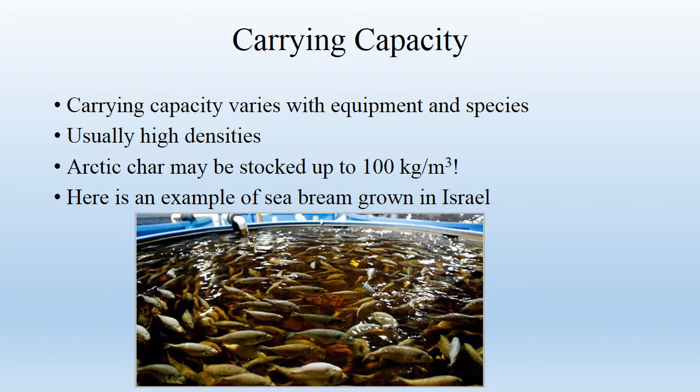Here you can see an example of some sea bream that are grown in Israel, and you can see how dense they are stocked in that tank. So we've seen this example before in class. This is the AKVA group example. But I'd like to include a link to their webpage so you can see their system for yourself, and it's quite intensive and, of course, quite expensive.

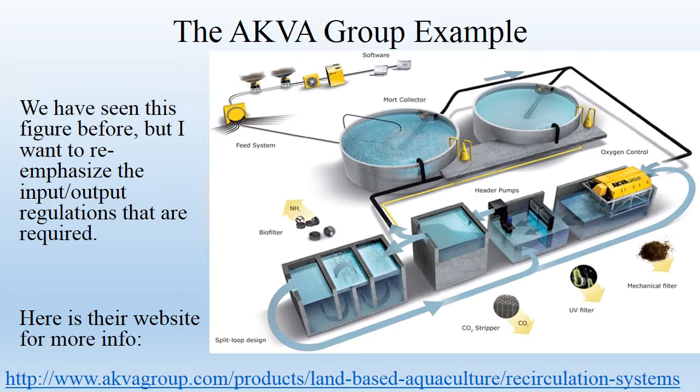Clear water systems are perhaps the most challenging to discuss because there's no clear right answer because there's so many variables. Each system is slightly different from the others depending on the species that is cultured, the company preferences, design limitations, cost limitations. We already know that we need tanks to grow fish, but the water will need to recirculate at an appropriate rate. The water will need to be filtered. The water will have to have enough aeration, and that all needs to be carefully controlled or you're going to kill your fish. So I'm going to focus a little bit on the recirculation part in particular because that is a very important part, and that's where all the variables come into play.

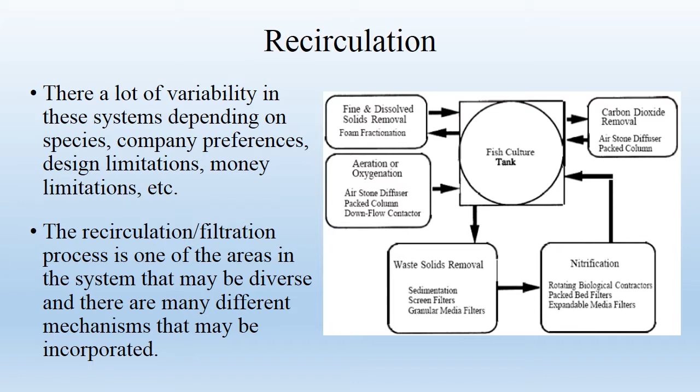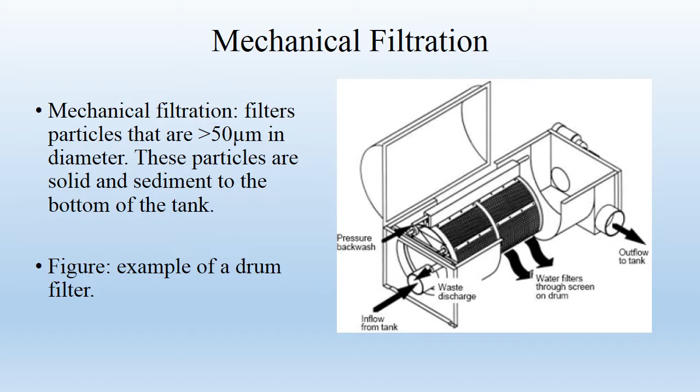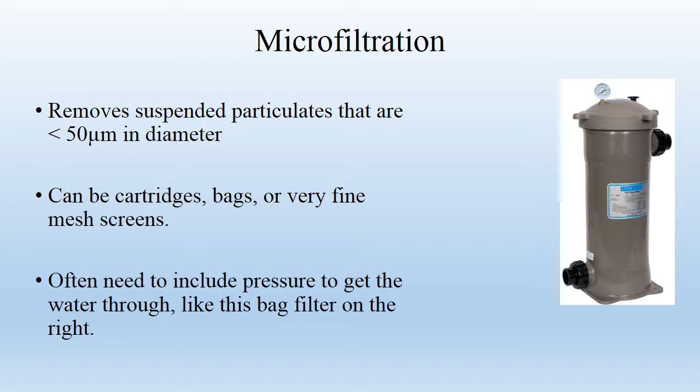This filter in quotation marks, because it's not really filtering, it's basically just blasting the water with ultraviolet light. And bacterial and viral and small parasitic nucleic acids can't handle this intense radiation, because ultraviolet light is radiation. And so it's going to irreversibly cause DNA damage to occur.

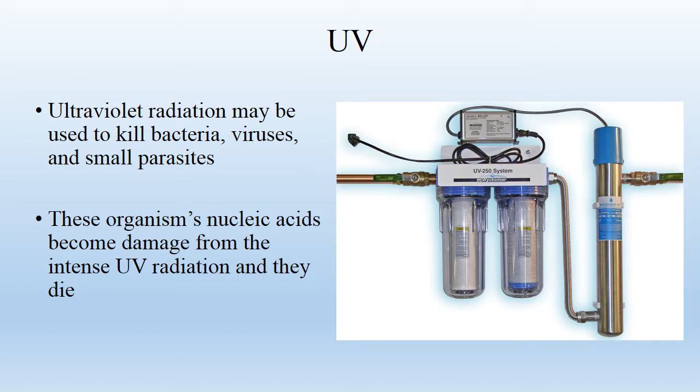Another option for improving the quality of your water is ozonation, and you can use ozonation instead of a UV filter or with a UV filter, I suppose, although you're just going to be paying more money for both. But ozone can be used instead of a UV filter because you can get away with lower daily water exchange rates, and oxygen is produced as an end product. The half-life of dissolved ozone is only 0 to 15 seconds. Ozone is O3, and then it degrades into O2.

But ozone is poisonous to fish, so your engineer needs to make sure that the ozonation tank isn't right before the water gets pumped back into the fish tank. You're going to need a couple minutes after ozonation of recirculating throughout the pipes or other filters before pumping the water back into the tank to allow that ozone to naturally degrade into oxygen.

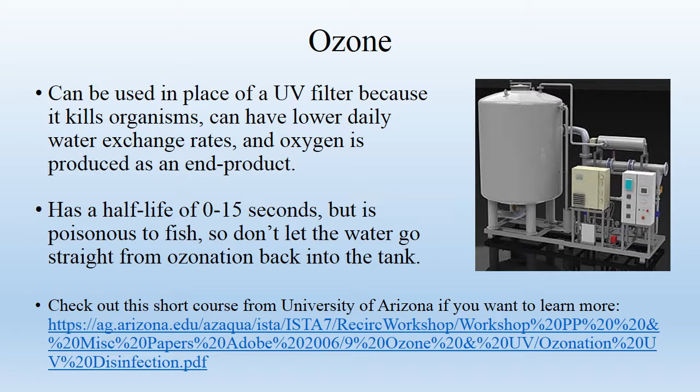Of course, we've already seen plenty of information on biofilters. We've read the biofilter publication, and a biofilter probably should be added because it's going to remove nitrogenous compounds like ammonia and nitrites, which of course will kill your fish. They can also be used to remove dissolved organic solids and even carbon dioxide, depending on the type of bacteria that the filter is harboring.

And of course, there's different types of biofilters, but the basic premise is that you get something with a lot of surface area and push the water through it, and you grow bacteria on all the surface area. And the bacteria like Nitrosomonas and Nitrobacter will help remove nitrogenous wastes and improve water quality.

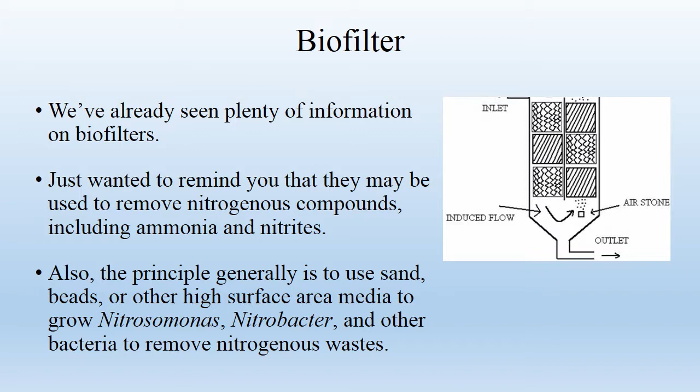So the last thing I'm going to talk about with regard to the recirculation process is oxygen addition and carbon dioxide reduction. There are many ways to do both of these. For oxygen, you can just bubble it in during the recirculation process directly into the pipe to increase dissolved oxygen concentration, but this is kind of difficult to do because the dissolved oxygen concentration is actually dependent on the pressure, which will be dependent on your pump and how much head your pump is able to achieve,

and the pipe length will also have an effect on your dissolved oxygen. So it is a little bit difficult to do, although the physical process of bubbling the oxygen in is not that expensive. For higher stocking densities, this may not be adequate enough to oxygenate your water so your fish can have enough oxygen. So you can buy an oxygenator, and an oxygenator produces up to 90% pure oxygen. And this oxygenator is integrated directly into the recirculation system, and it produces the oxygen.

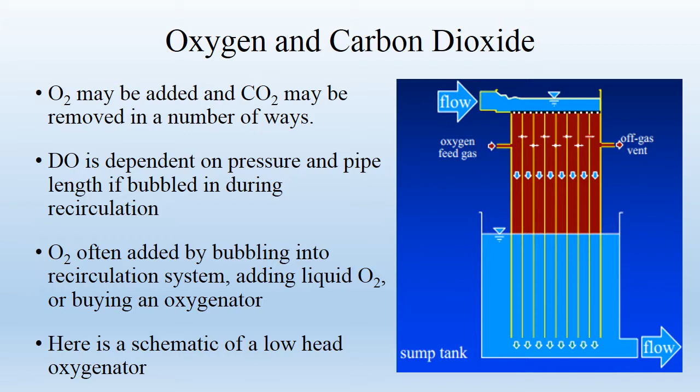And carbon dioxide may be removed by the bacteria in your biofilter, but at higher stocking densities, your fish are going to be respiring quite a bit, and you'll need probably a carbon dioxide stripper to remove carbon dioxide and sulfides. And a carbon dioxide stripper is just another piece of mechanical equipment in your already mechanically intense system.

And I should mention that for these complex systems, you are going to have a lot of mechanical equipment, and it's going to be very complex, and an engineer will need to be consulted, if not hired outright, depending on how large the company is.

Once again, there is a super good short course from the University of Arizona if you are particularly interested in oxygen and carbon dioxide. And they have a lot more information on what a carbon dioxide stripper is, how it works, and what it does.

So there's, of course, many other things that you have to control for. You do need to feed your fish multiple times a day in these systems because it is clear water. There's no food in the water. There's no algae, phytoplankton, diatoms, nothing. So you will need to carefully feed your fish and monitor their feeding habits. The temperature needs to be carefully controlled.

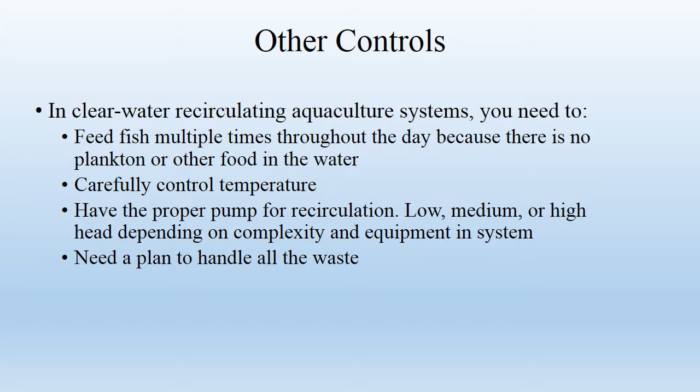Now to costs. There are many factors that go into cost: gear durability, maintenance of the system, and it really all depends on the type and quality of individual components that you buy. When you set up a recirculating aquaculture system, you really have to have a strong business plan from the outset before you even start buying equipment. Really, you need to know how much money you're working with, so you can budget for your equipment.

Costs will also depend on the amount of capital you have at startup, because larger systems often have lower maintenance costs than smaller systems based on the cost per kilogram of product. And if you have a lot of startup capital, and we're talking millions of dollars for these systems, you can design a large facility that has a low cost per kilogram of product.

And even if you and maybe like one other employee are going to run a small system, these systems are not cheap, and you're still looking at money in the hundreds of thousands of dollars range. And if you have a lower cost system up front, you're going to usually be buying cheaper equipment. That equipment will need more maintenance costs over the long term. And so for a smaller system, you may be economically dependent on your first few crops of fish right out of the gate. But if you have a lot of startup capital, you may not.

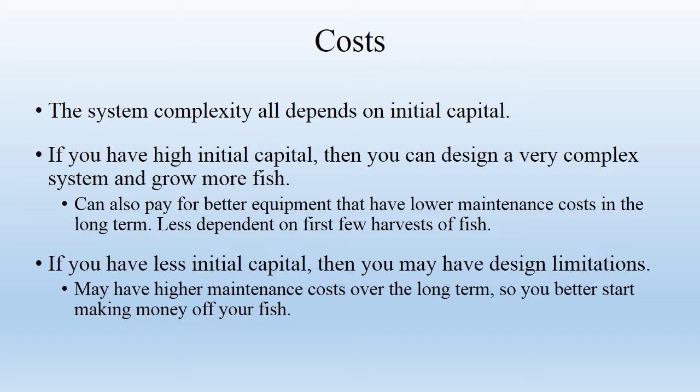All the equipment, complex system of pipes, tanks, personnel, especially depending on how large your system is, and then careful monitoring of your water quality, fish, feed. There's just so many costs. And this article kind of goes into the costs of recirculating aquaculture systems.